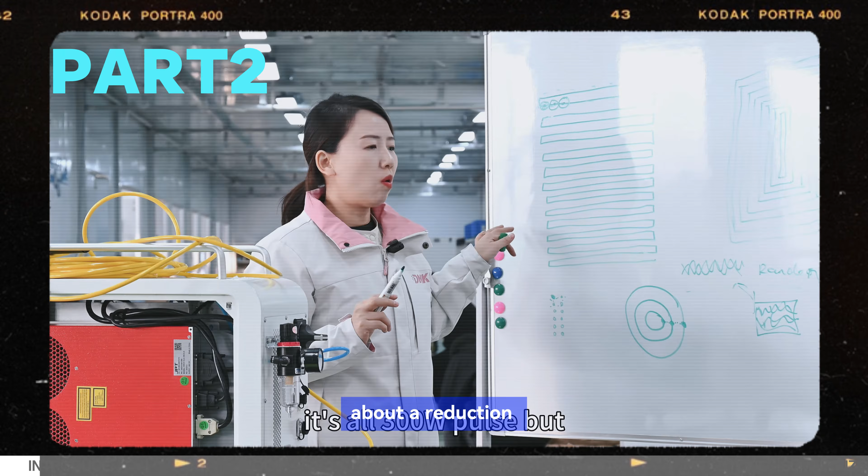In the last videos I talked a lot about the frequency, the power and things, very theoretical things, with a lot of paragraphs and drawings. Many people who meet me at the show in FabTech ask if I'm the engineer. Frankly speaking, I'm not an engineer, but every time I write an article on a topic, my engineers, my R&D people, help me with the content. I read the content, remember it and explain it to you.

But the last series of videos got too theoretical. So this time I invited Mr. Zhang to help me with the content, all the tips, the very realistic and helpful things that simply teach you how to use a laser cleaner to clean all kinds of materials.

My favorite part is when everybody visits us in our workshop, some of them make a competition with him, each one operates the machine and you compete making tests on different kinds of materials. He's very professional, but he's not the best in the world. Sometimes, like Kelvin or some people, they visit us and win with their parameters. We also learn from them and from you. So I hope many of you will visit us in Wuhan, in our workshop, and you can compete with him.

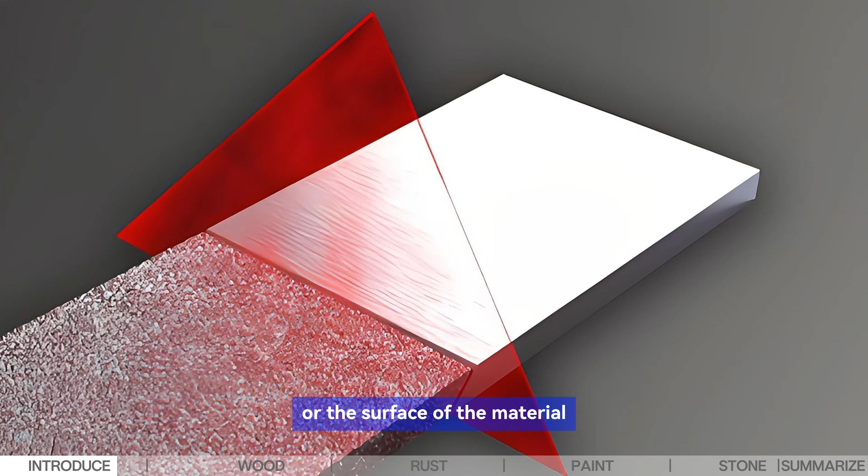Before making the tests on different kinds of materials today, I'm going to simply repeat what laser cleaning is. It's using laser power absorbed by the dirt or the surface of the material to precisely take off the dirt without water, chemicals, or other things. So it's very clean and very environmentally friendly. It's like a brush, only taking off the dirt and the things you don't want, but protecting the base material.

So simply, we choose the parameters depending on the laser power, the frequency, the scanning speed, the scanning width, and also the patterns, the beam shapes, to achieve the effects that you want. So now I will let Mr. Zhang operate and show how to clean all different kinds of materials.

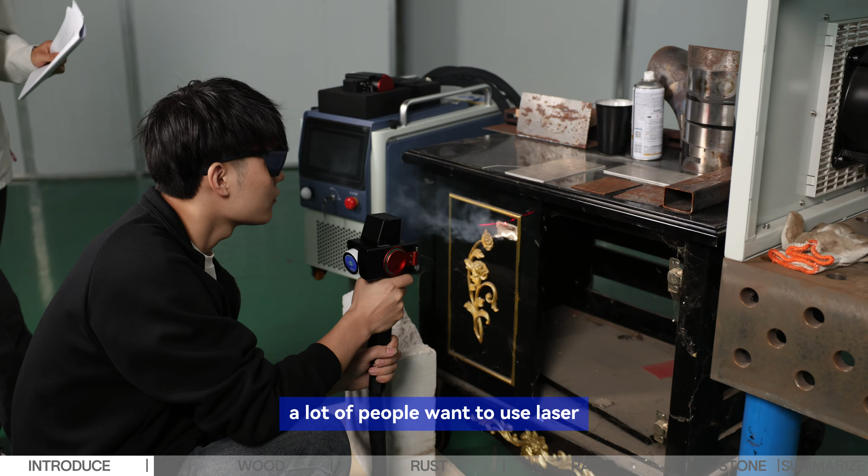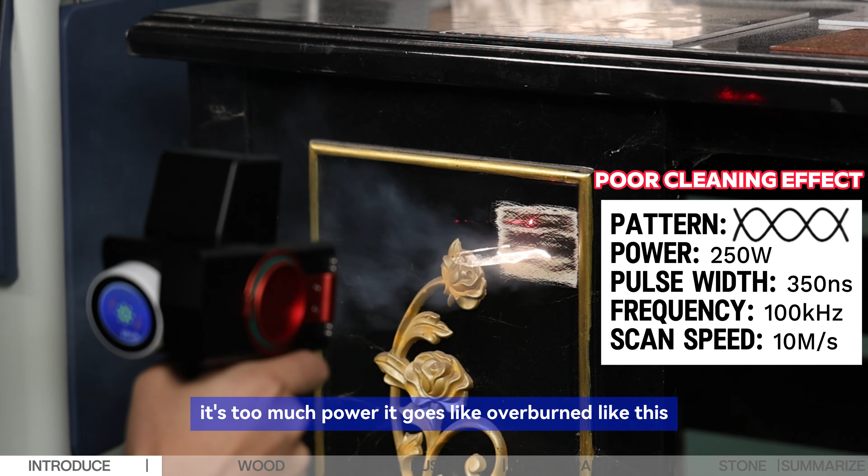First we will start with wood. The most fragile material to be cleaned with laser, but it's very popular. A lot of people want to use laser to refurbish their furniture or their house. For wood, because it's very fragile, if there's too much power, it gets overburned, like this. A little bit overburned, too much power on the surface. Then we will switch to another beam shape.

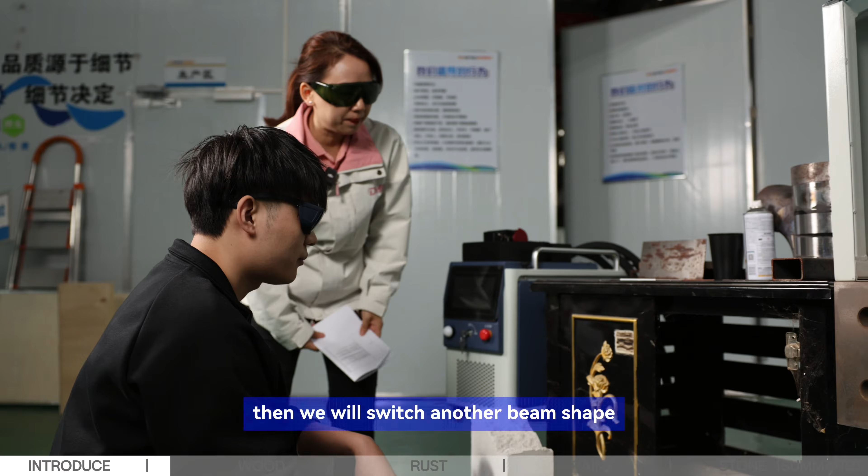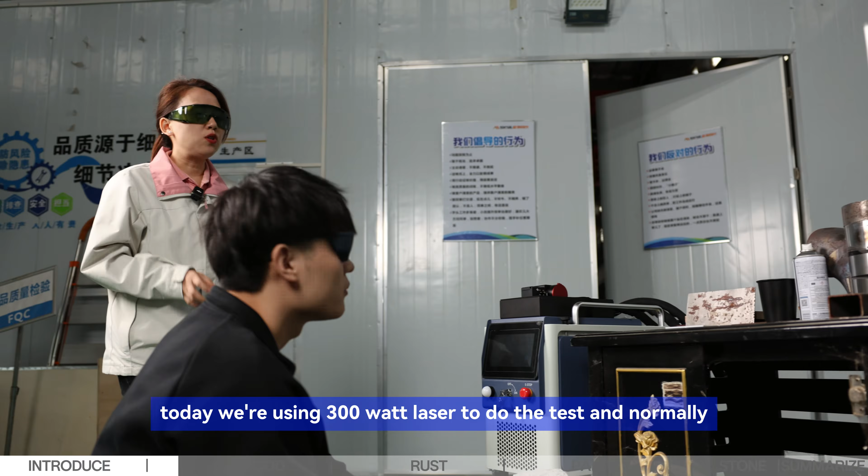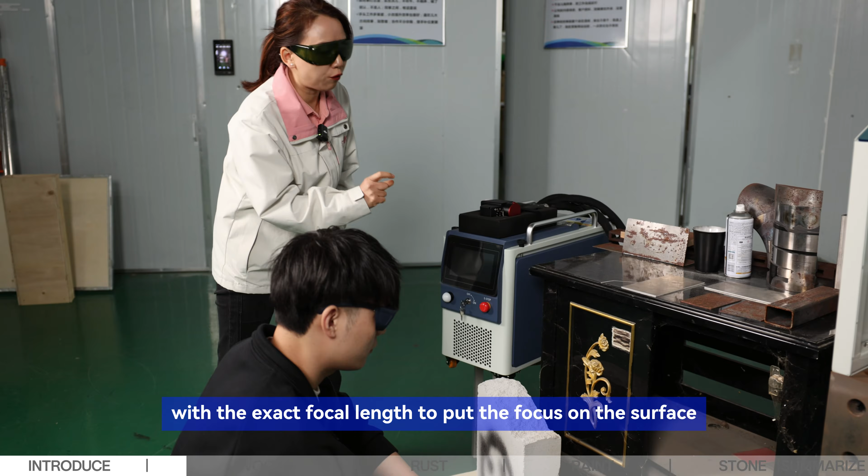So the first tip for cleaning wood is never put the power too high. Today we're using a 300 watt laser to do the test. Normally we suggest you start from 50% of the machine's power, going from lower power toward the maximum to get the speed. Second, you need the exact focal length to put the focus on the surface of the wood. You can use the red dot to make sure: when the two dots overlap, you get the focus on the surface.

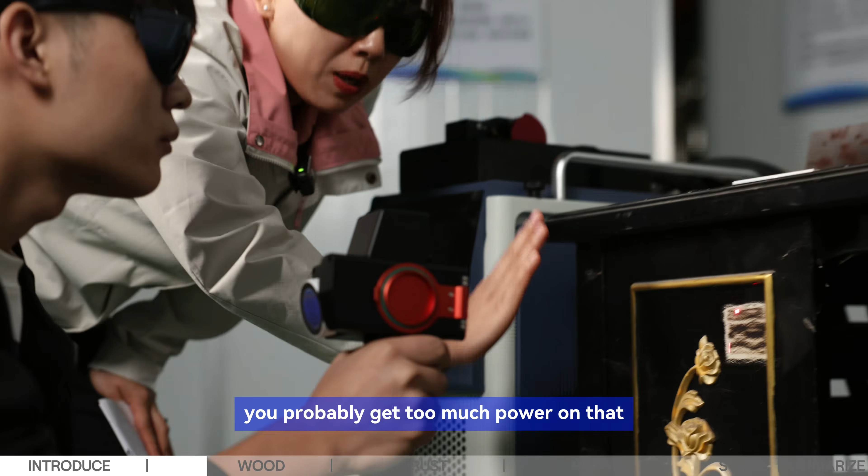So the hand must be very stable because wood is very fragile. If you go out of focus, you probably don't have enough power, or if you stay there too long, you probably put too much power on it. So the hand and the movement need to be really smooth and stable.

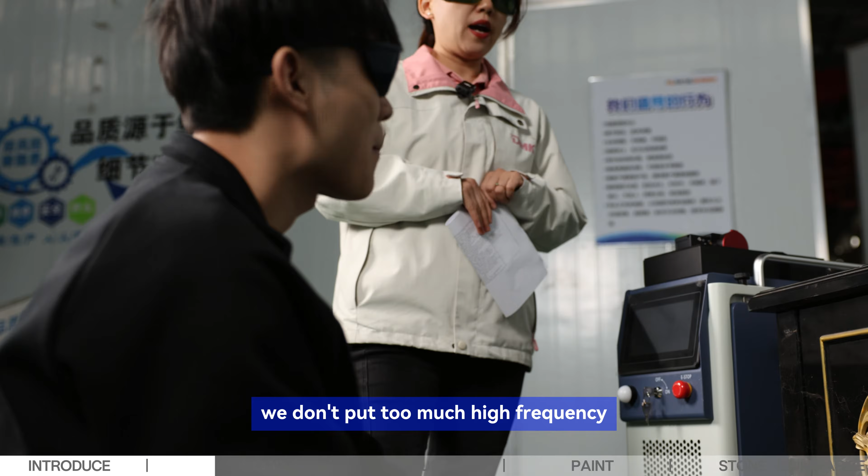Third, normally we don't use too high a frequency. This puzzled me for a long time, because theoretically with a very high frequency you get fewer millijoules per pulse. But this is only theoretical. Too high frequency means you have a lot of dots, many bullets in 1 second, so you get overlapping of the beam on the surface and easily burn the wood.

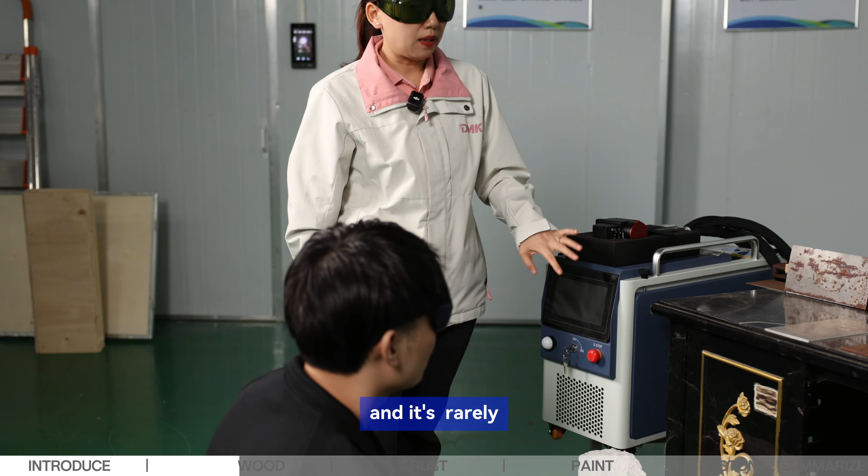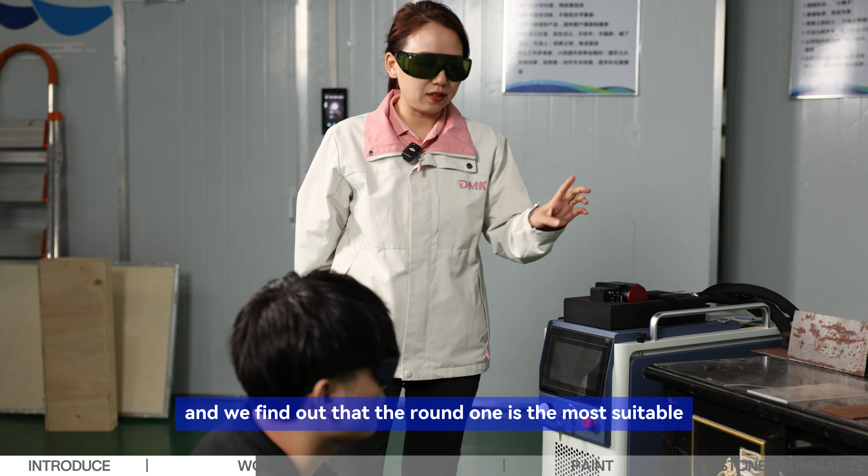So normally you use the parameters saved in our machine table, which are relatively medium or low frequency. Now we're using 130 kilohertz. And the last point, we use the round shape, which Mr. Zhang said is the best one for cleaning wood, and I also proved it when I was operating the machine with Michael. We found that the round one is the most suitable and gets perfect effects with wood. Please show us.

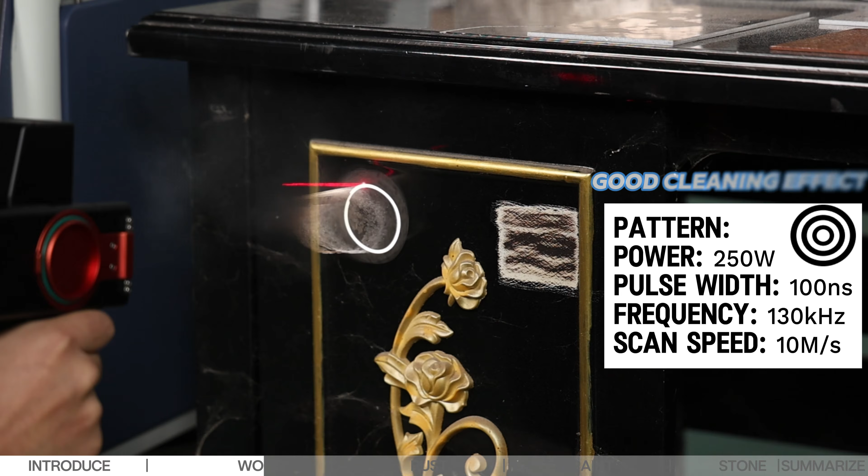This shape shows a very gentle effect, and he has a very stable hand, and the movement is very smooth, so you never move too slow or too fast. You get equal effects on the surface, and now it's cleaning very well. And this shape is the best one for wood cleaning.

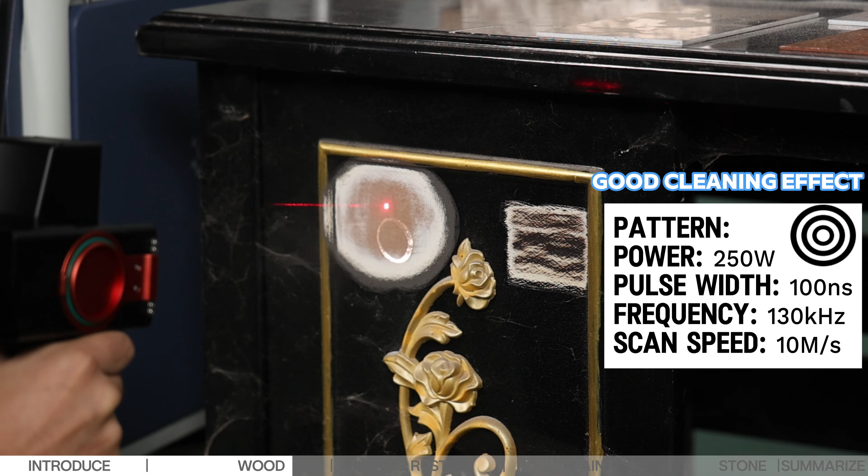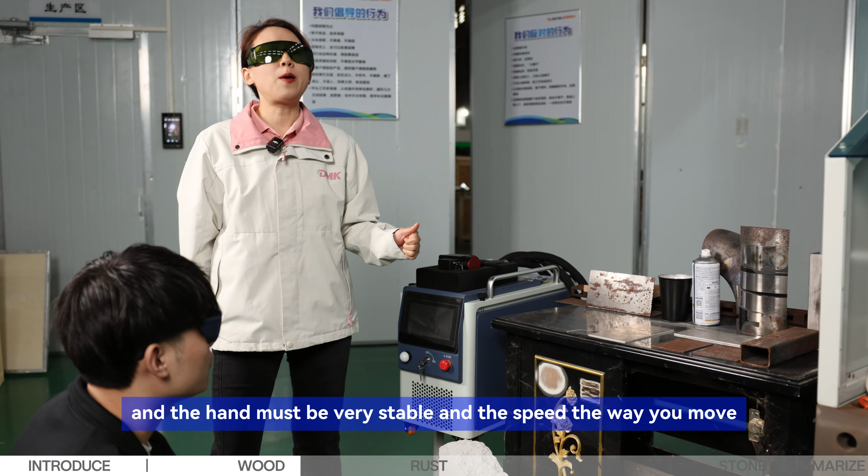Now it's taking off almost all the paint, and the color of the wood came out. Perfect cleaning. So in the end, the conclusion is that the focus must be right. You need to put the focus on the surface of the wood, and the hand must be very stable. And the speed, the way you move, you never go out of focus, you control the speed, and you do it many times. With very gentle parameters, you do it more times, it's safe for the wood.

And the last is the shape. We have 11 shapes, beam shapes, in our database, but the round one is the best for wood.

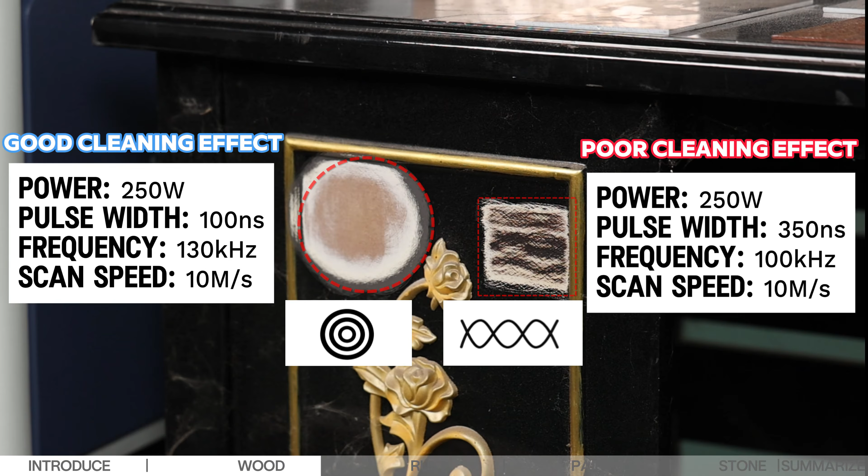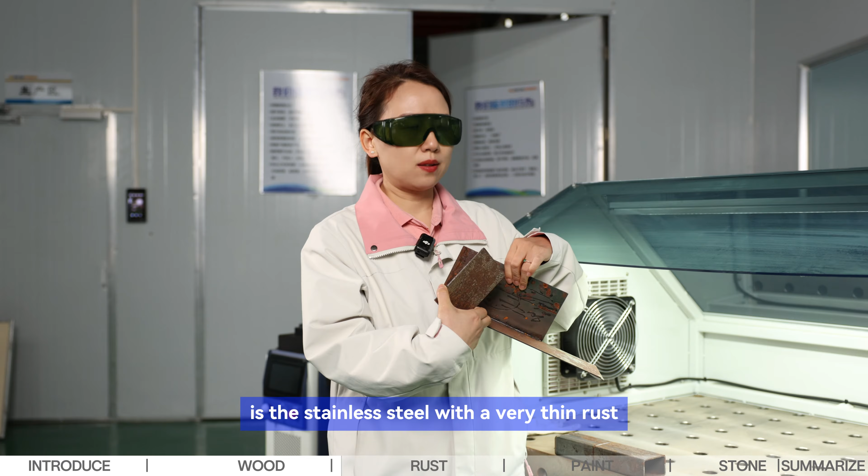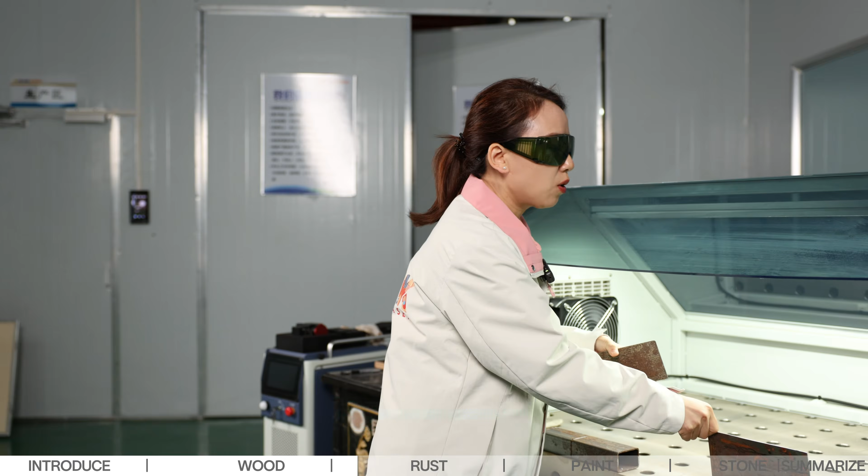So now we start with the rust removal, because rust removal cleaning is also a very common scenario for laser cleaners. And today we're going to show two examples. First is the stainless steel with a very thin rust, which is just rusted, or it's a precise part and you want to protect the part. And this is a heavy rust on mild steel. So it's like a big part, and you don't care so much about distortion or heat, so you just want to take it off and get it clean. So let's see how to choose the parameters for the thin and thick rust, please.

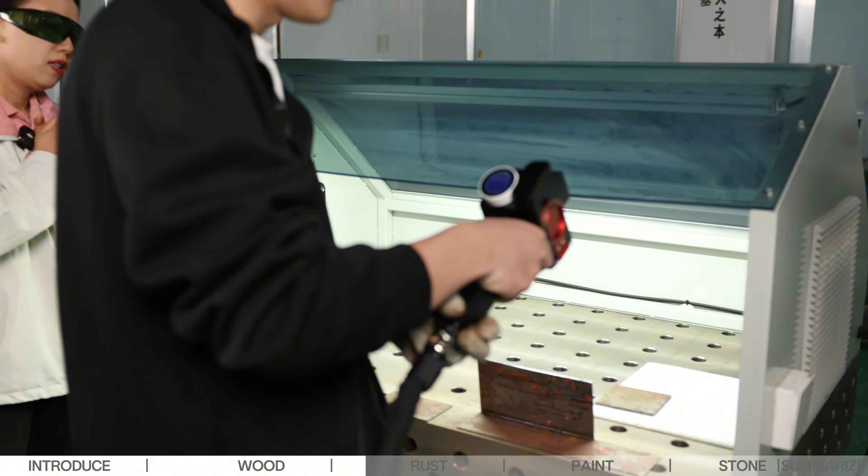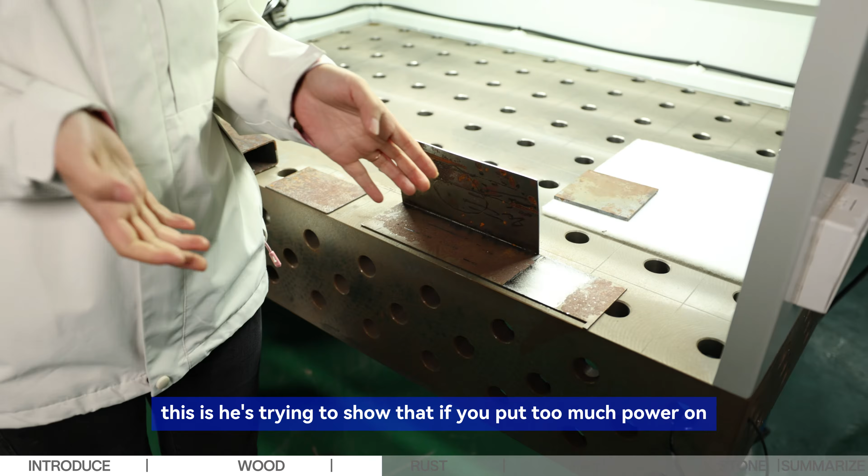For the very thin rust, normally you start with medium or low power, and you try it many times back and forth, to protect the base material. He's trying to show that if you put too much power on that, you not only take off the rust but also burn and oxidize the base material. So too much power. So let's do it again.

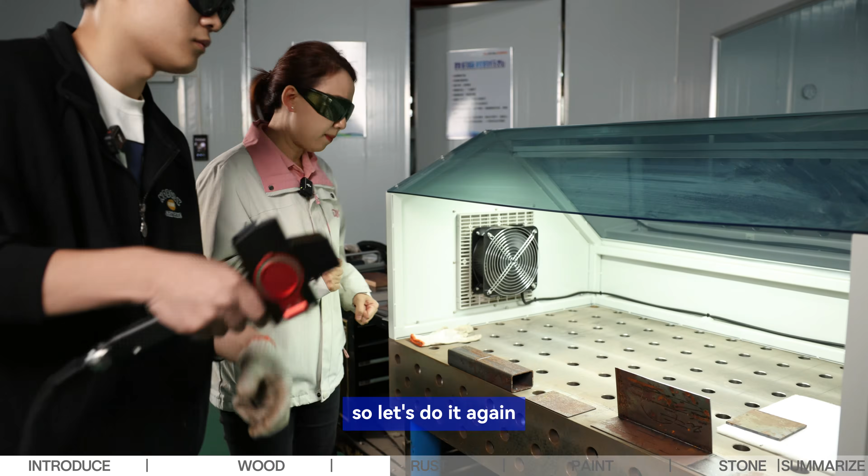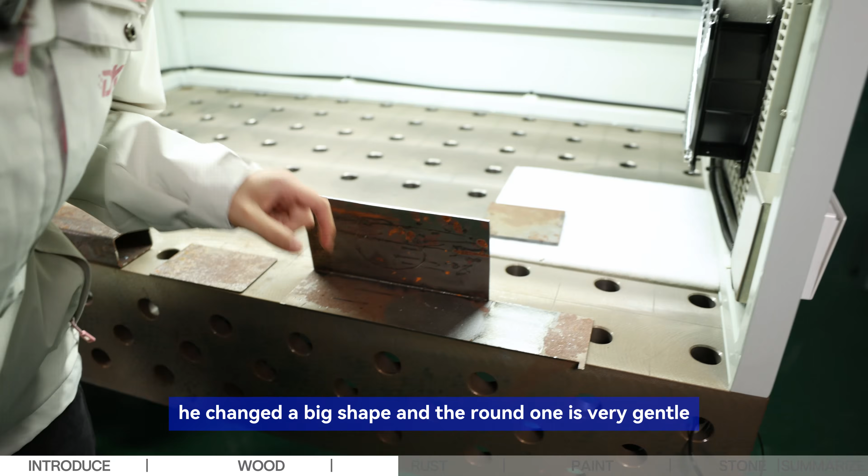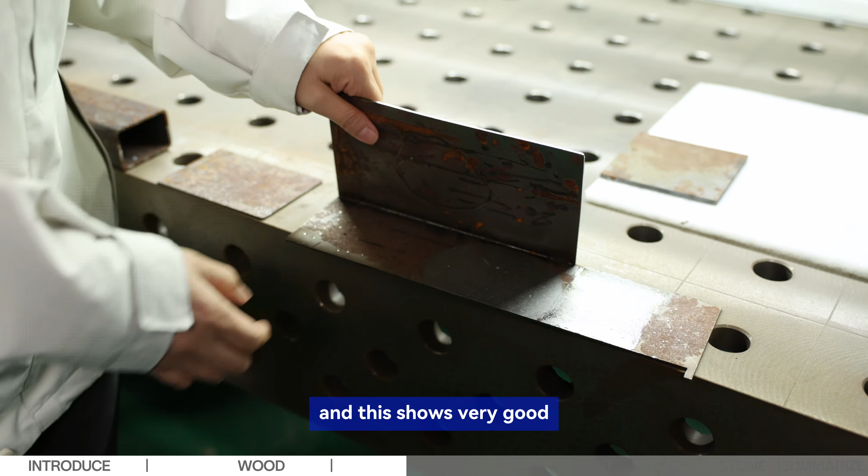He changed the beam shape, and the round one is very gentle, always very equal. The laser beam dots on the surface are always very equal, and this shows very good results. No black marks, and it's very clean.

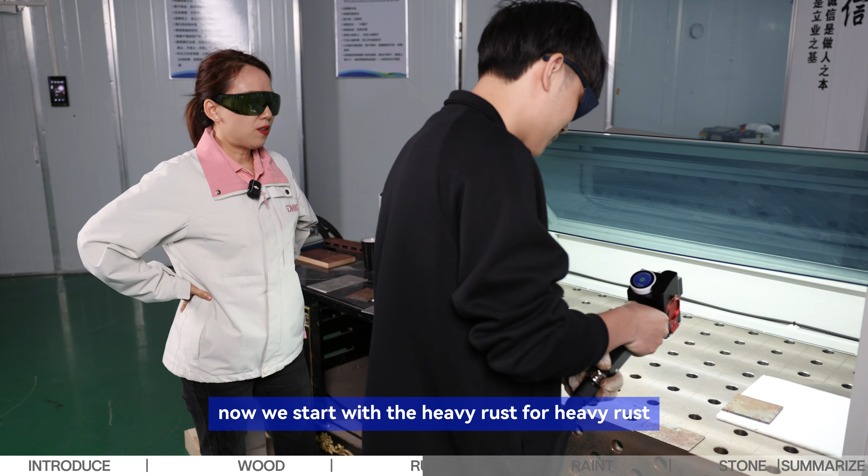So now we start with the heavy rust. For heavy rust, you need to go high power. If the power is not enough, you don't get a good effect. You don't take the rust away.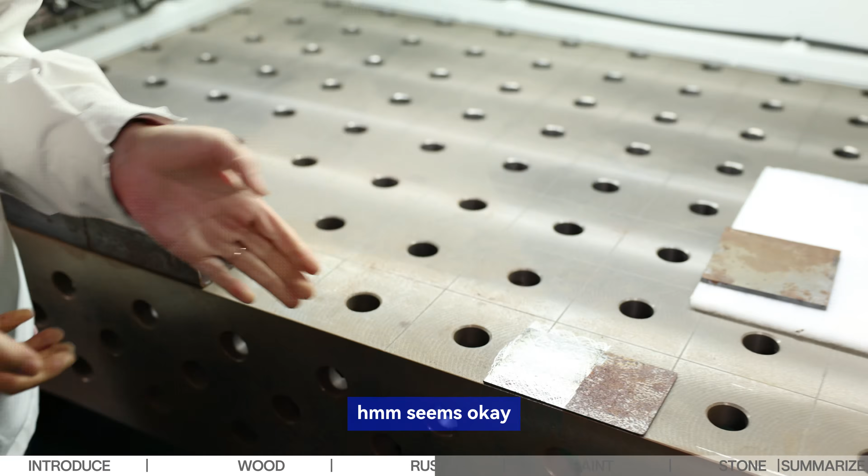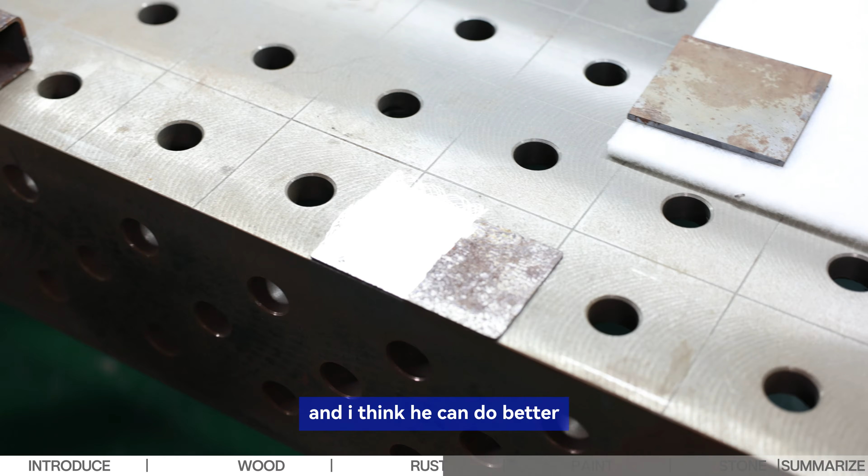Seems okay, but he can do better. Let's switch to another parameter to make it better. There is some rust that hasn't been taken off, and I think he can do better. So we will make a comparison of two sets of parameters and how he changed them.

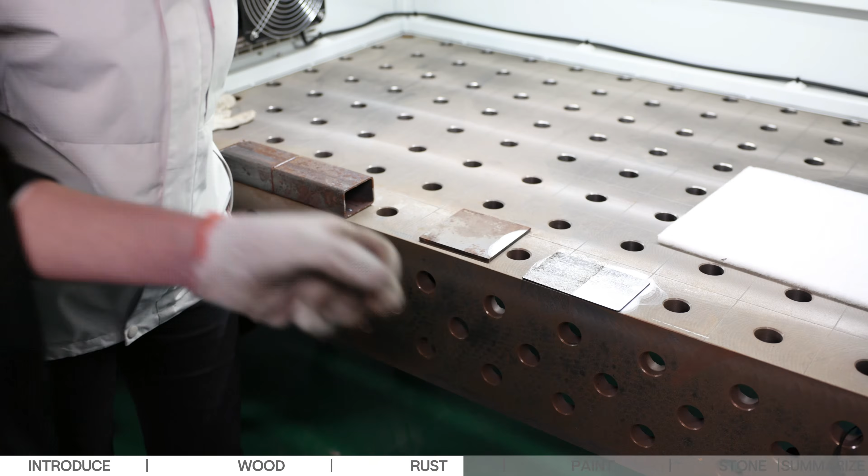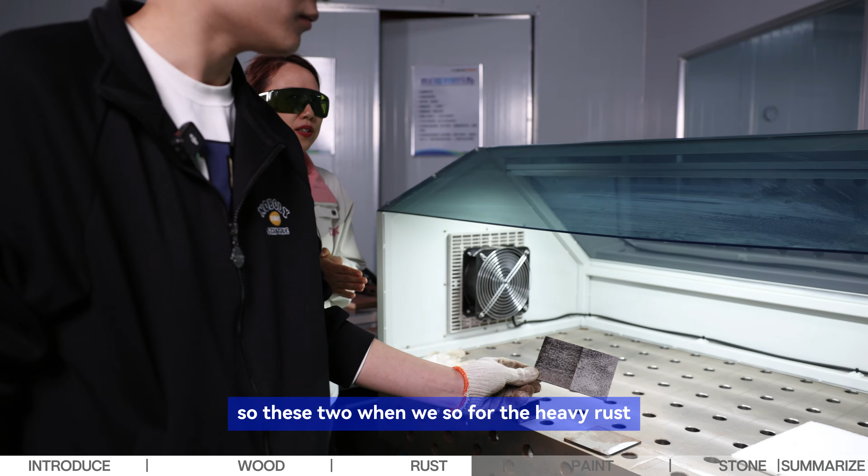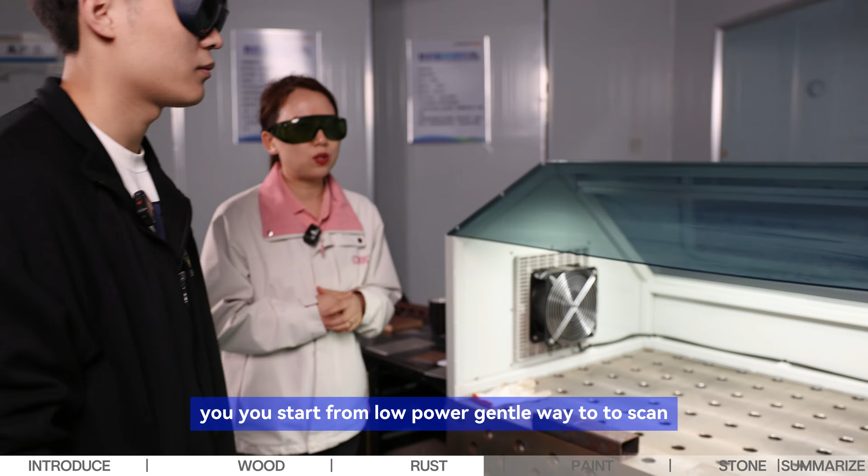So these two, for the heavy rust, you need high power and many times. And for slight rust, you start from low power and very gentle parameters. You start from low power, a gentle way to scan. And if it's just a big piece of metal, you use the maximum power, the best power of the machine, to take off the rust, vaporize the rust in a second.

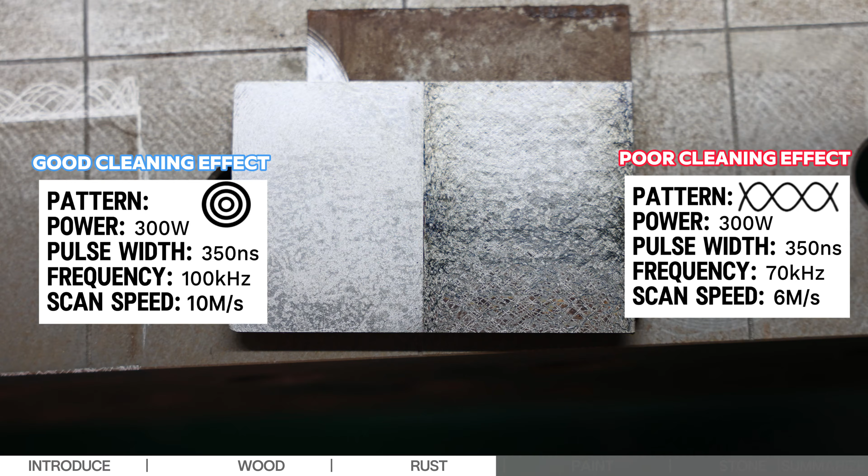So now we're going to test the oil and paint, which are also very common applications of laser cleaning. And for oil cleaning, it's very easy for it to catch fire. So we suggest you use a cloth to clean it before using the laser on it, to avoid the oil absorbing the laser power and catching fire. So after cleaning with the cloth, you start with low power. Oil is very easy to take off with a laser because it has high absorption of laser power, so just scan it fast because oil is always very thin.

For paint, it's another story. It depends on whether it's a thick, heavy paint or a very thin paint. Normally you use high power, full power, and it's also important to do it in many layers. So you don't try to take off the paint in one time, because if you put too much power on it, you cause distortion from the heat, because paint is always on sheets, so you make distortion. So normally we do many layers, we scan many times.

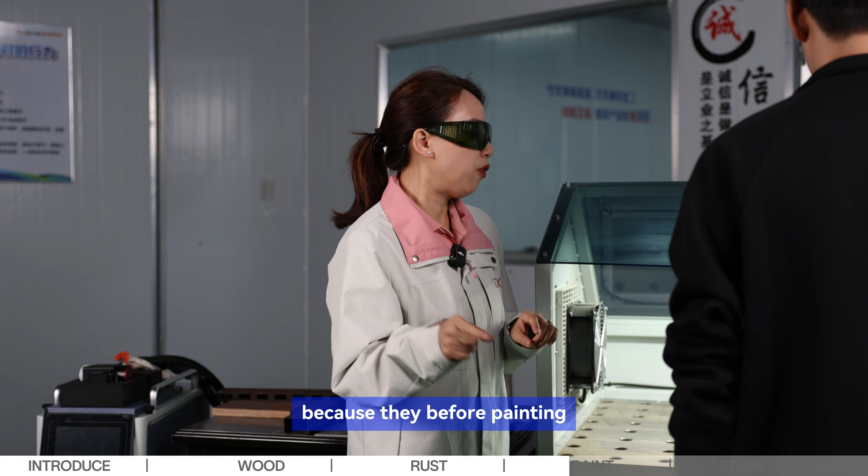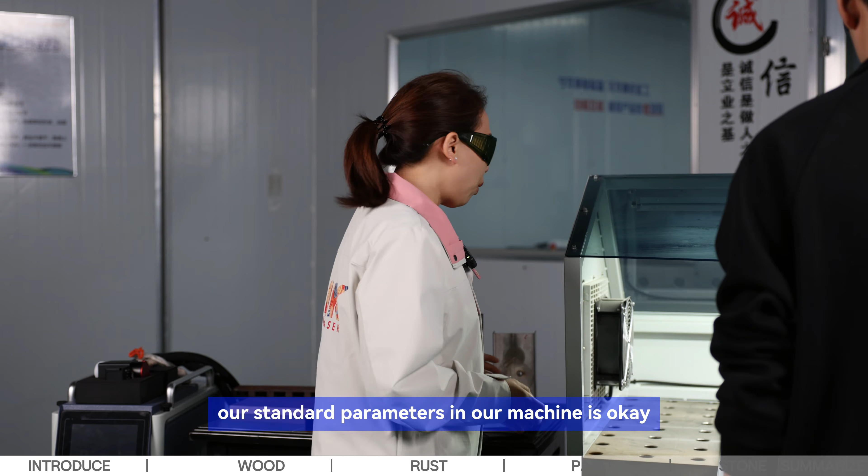Normally, before painting they put on a base attachment for the paint, so it's not easy to take off. You go with high power and you scan many times. If you discover it's a very thick paint, you adjust the power. Normally the standard parameters in our machine are okay, but if you think you need a minor adjustment, you can adjust from there. Let's make the test.

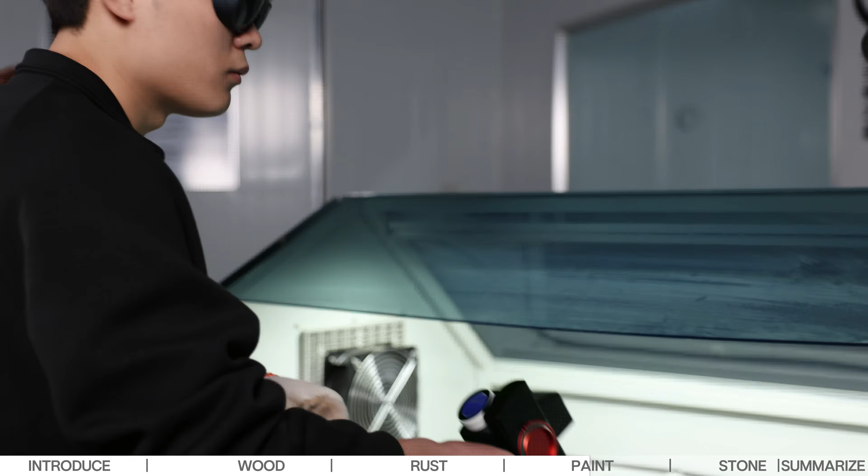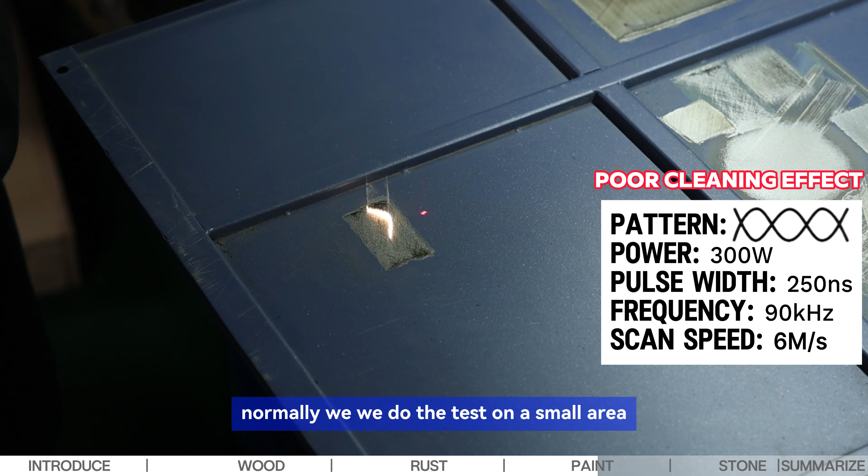And normally we do the test on a small area that you guarantee that you can make it perfect instead of going directly on main clean.

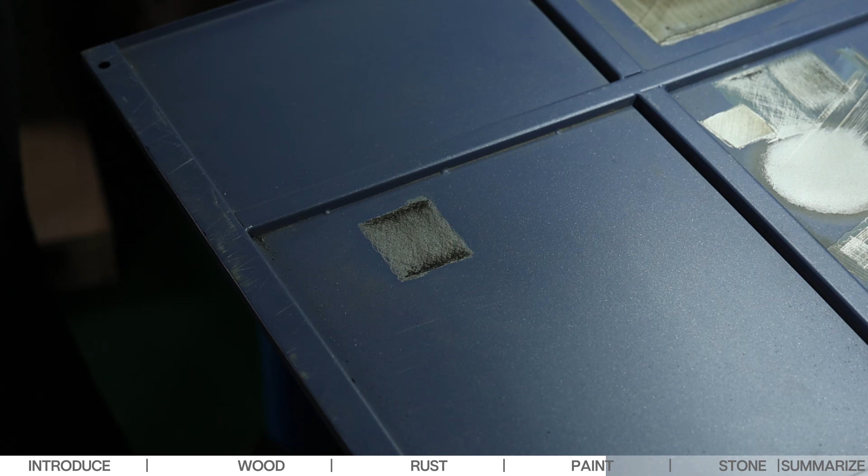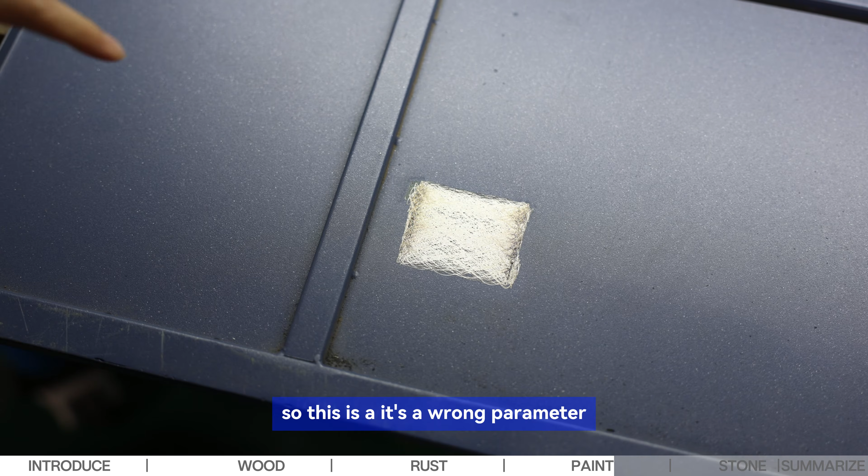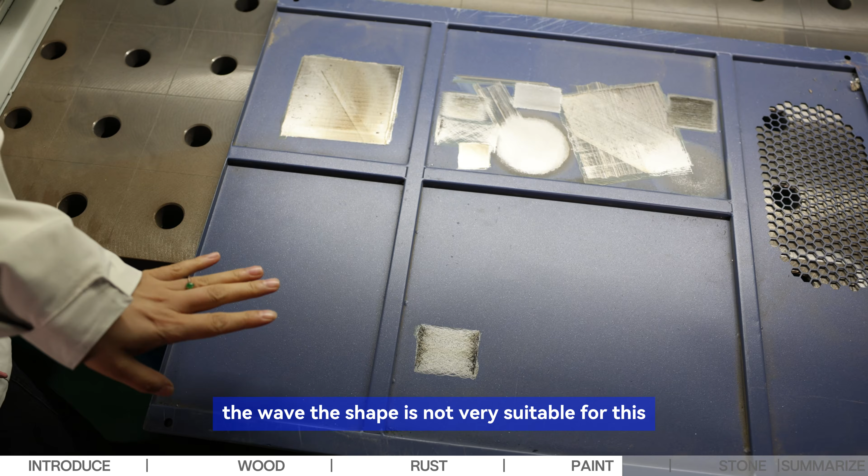So this is a wrong parameter. So you see that the paint hasn't been taken off and it's a little bit overburned on two sides. So the wave, the shape is not very suitable for this. So he will switch parameter and do it again.

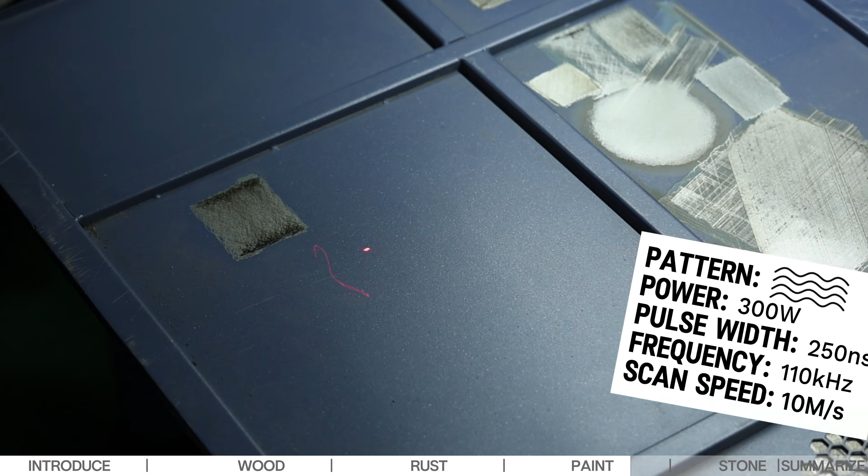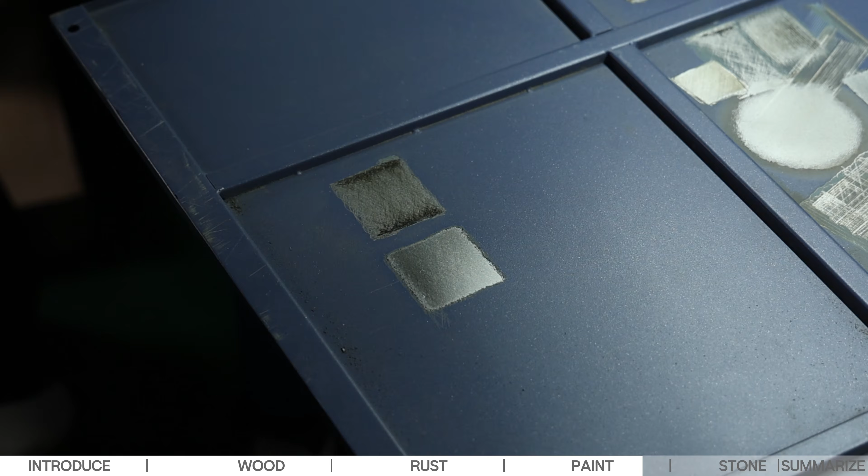He changed the scanning speed and also the shapes. It's all waves, but we have two different kinds of wave shapes. So this one is obviously working better. The paint has been cleaned, and you see that he cleaned many times, many layers, and the base shows very good and it's not so hot.

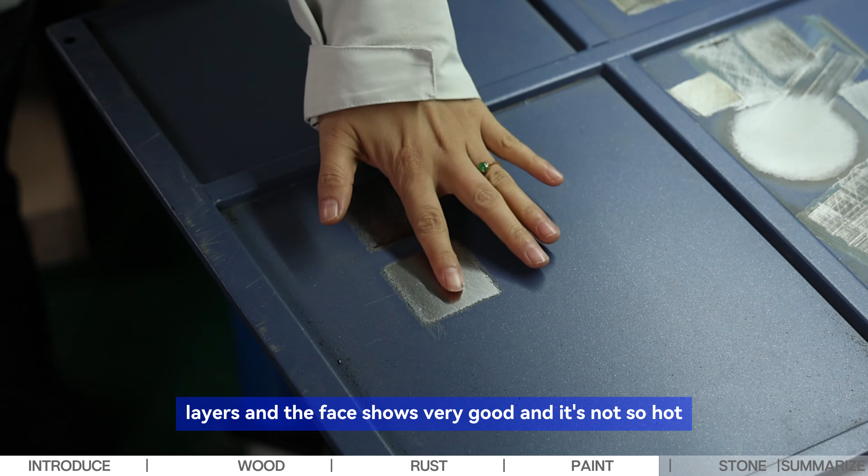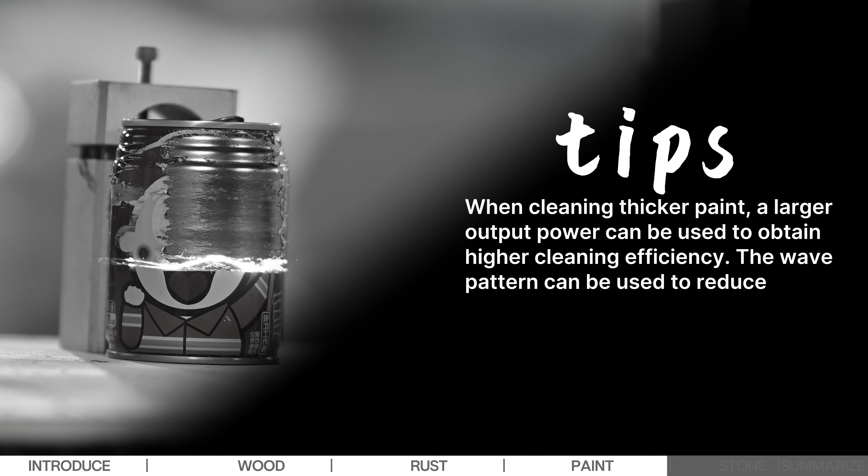So now next we're going to clean the bricks and the stones, which is very normal also as the graffiti. You need to clean on the walls, on the floors. For this it's very easy because this kind of material is very heat tolerant, not afraid of heat. So it means that you can go with high power to take it off very easily. But also we suggest you test from a small area with slightly more layers so you can be more safe to get the perfect parameter.

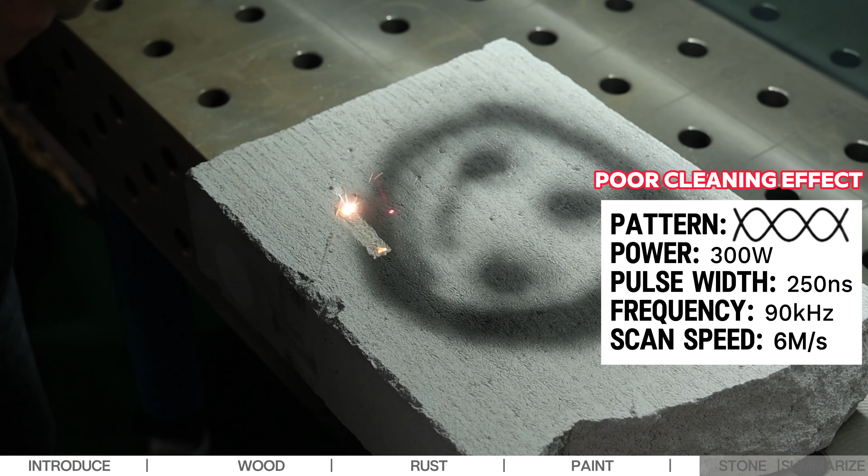Let's go. So normally our suggestion is that you keep a good cleaning speed. You don't stay in one area too long and make a good effect. If you stay in one area too much, then you probably burn the material. So the very important thing is to guarantee the cleaning speed.

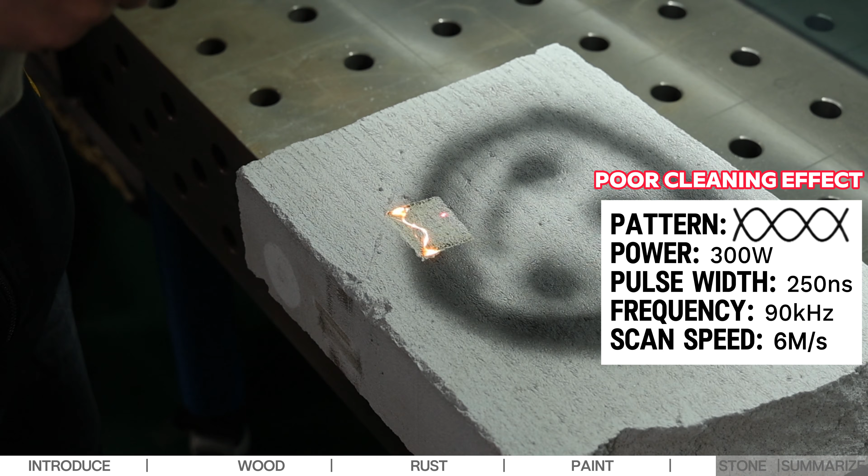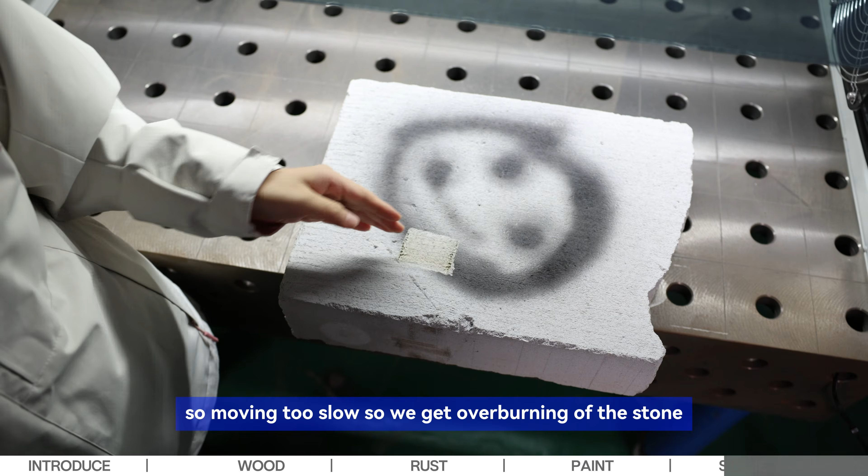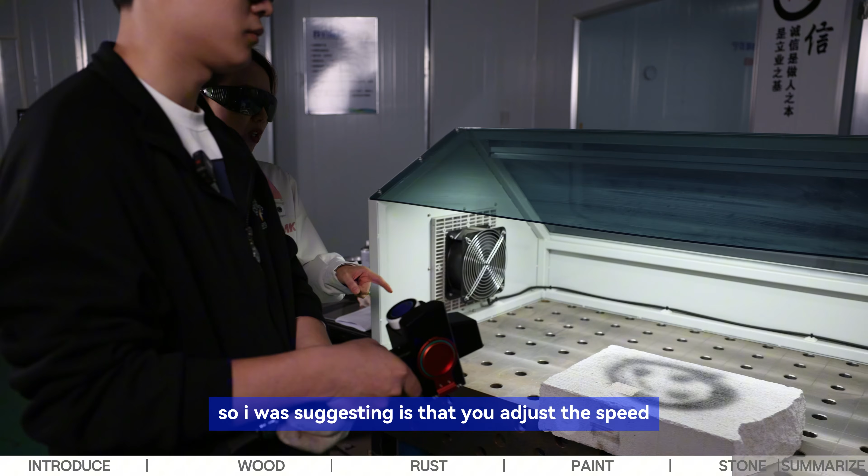Like this one, he stayed here too long, moving too slow, so we get overburning of the stone. Even though the stone is very good for heat, it still gets overburned. So our suggestion is that you adjust the speed and you don't stay in one area too much.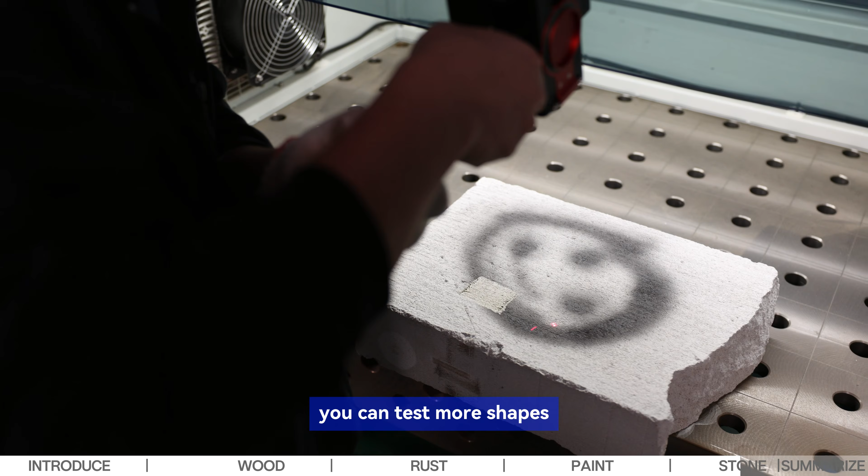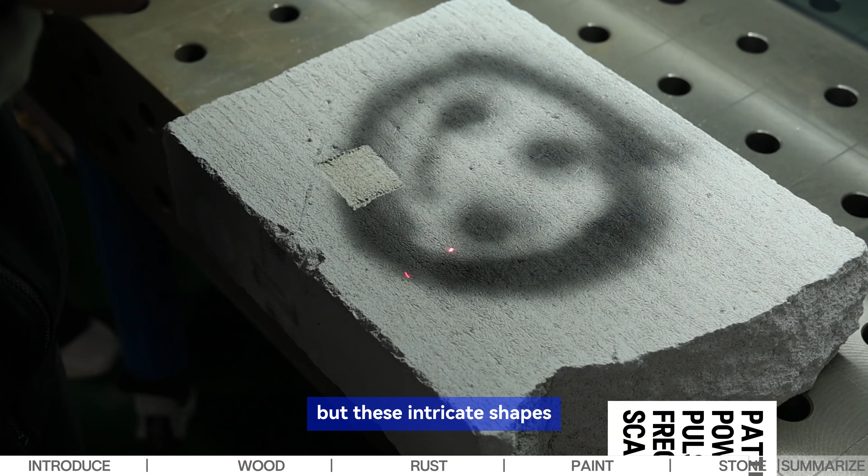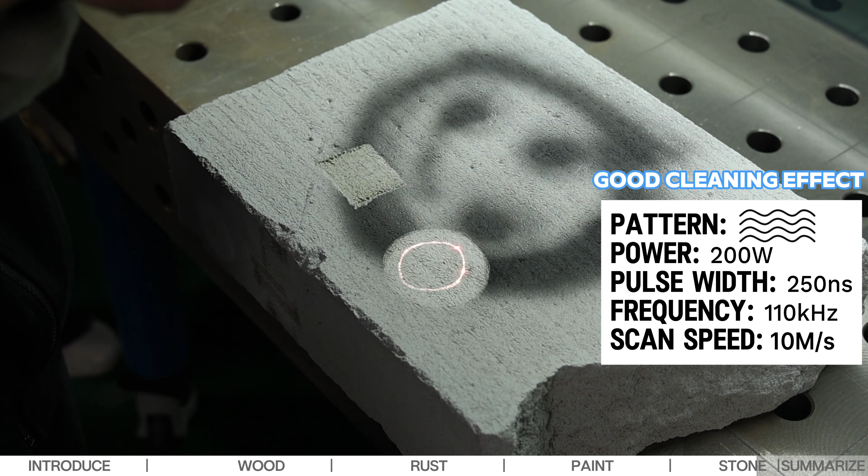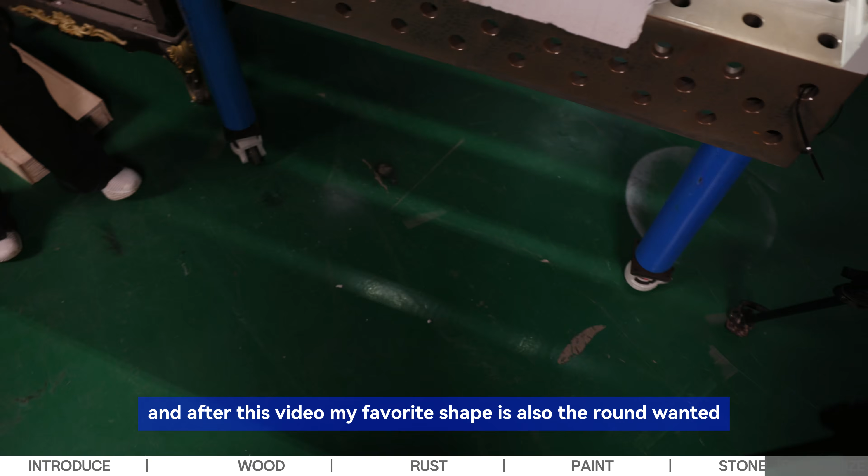You go quicker. For the non-metal materials, you can test more shapes because it has many cracks inside. With different shapes, you probably find the perfect one to go, somewhere higher, somewhere lower, for these intricate shapes. So again, Mr. Zhang's favorite is the round one. And it's very good. It's perfect. It's taking off everything in the holes. And after this video, my favorite shape is also the round one too. But he said the waves go faster on rust removal.

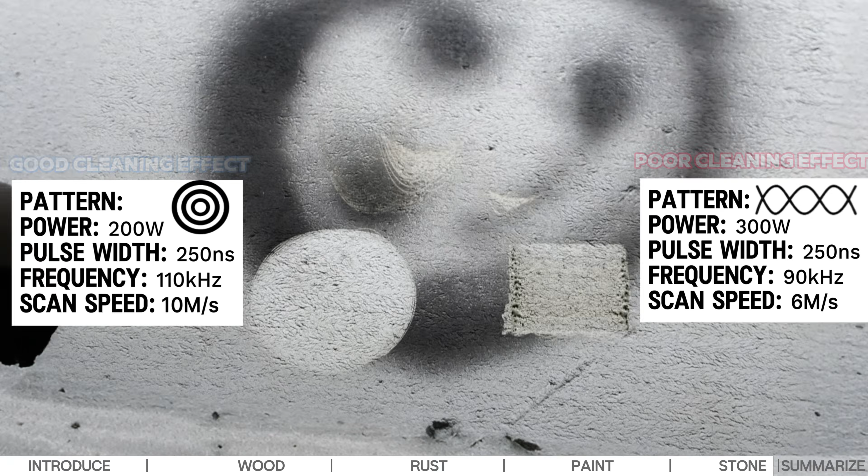So after making all the tests, we try to bring you real cases of how to use different parameters to clean and all the tips that you need to pay attention to on different materials. And also Mr. Zhang has made a data sheet for you with all the tips, not only the parameters, but for paint, wood, rust, stones, and all the tips that we have mentioned in the video.

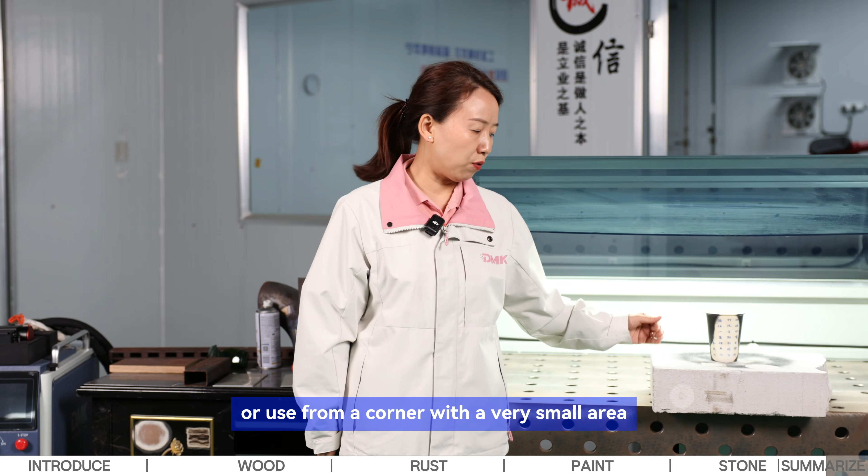So in general, the tips are: first, you need to recognize the material. So every time you go to a customer or someone brings you a sample to clean, first you judge what kind of material it is. It's wood, it's metal, it's rust, it's paint. So you need to make clear what kind of material. And second, you need to start from a small area. Never go on a big piece or a big area. Then if you choose the wrong parameter, you probably ruin the thing. So you start with a similar material or a very small area.

And third, try to do many layers many times to do it gently, to protect the base material and to be safe. Never just arrive there and use the maximum power, or you probably destroy something. So this is the third. So with all these tips, we hope that you can provide better cleaning service and use your machine to ultimate effect.